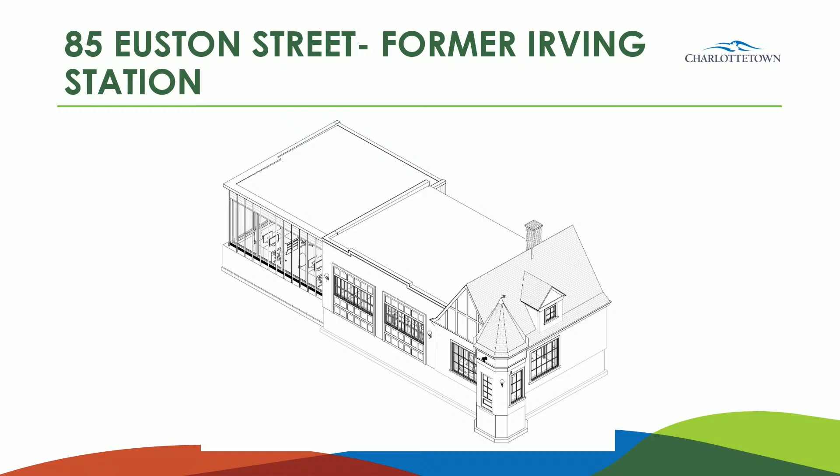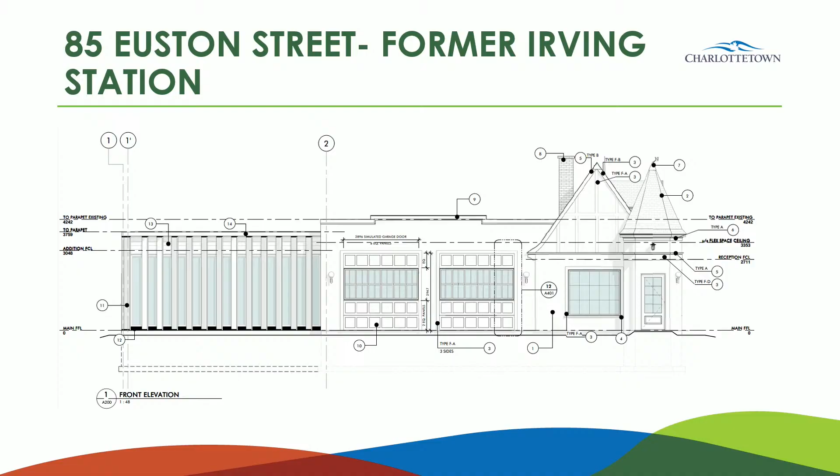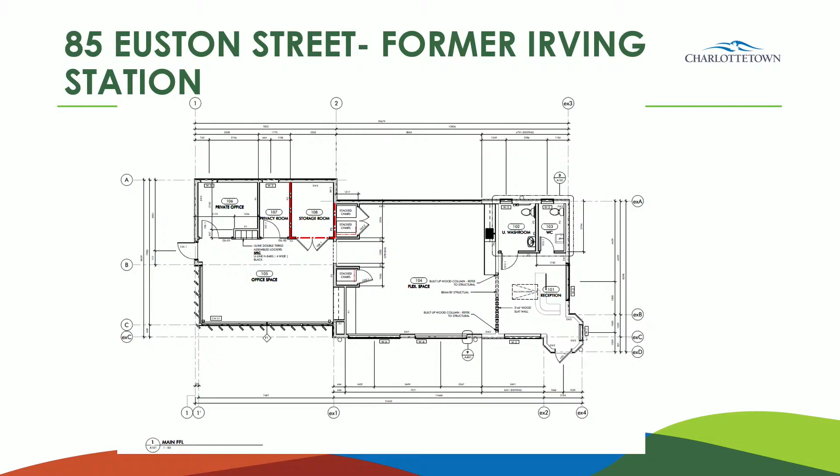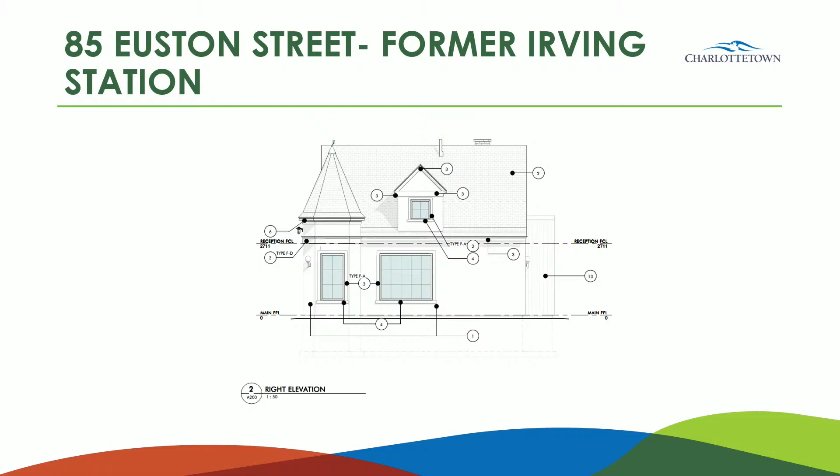The approximately 25-foot by 26-foot new addition is set back about 2 feet from the front facade of the main building, and the addition is to be clad in a combination of black vertical metal cladding and a Nordic oak batten system. The new addition will accommodate office and storage space, while the original structure will accommodate a flex space to host groups and/or events. Historic details such as molding profiles, the weather vane, and appropriate lighting fixtures are to be reinstalled in original locations.

So it's recommended that Heritage Board recommend to council to approve the application for the rehabilitation of and a new addition to 85 Euston Street. And I'll just have Faye explain further a little bit. Thank you. Faye, welcome.

She'll switch it over. Okay. Good evening. My name is Faye El Haj, architect with Archwork Studio. It's my privilege to be here today to present for you our approach to preserving and revitalizing this important heritage building.

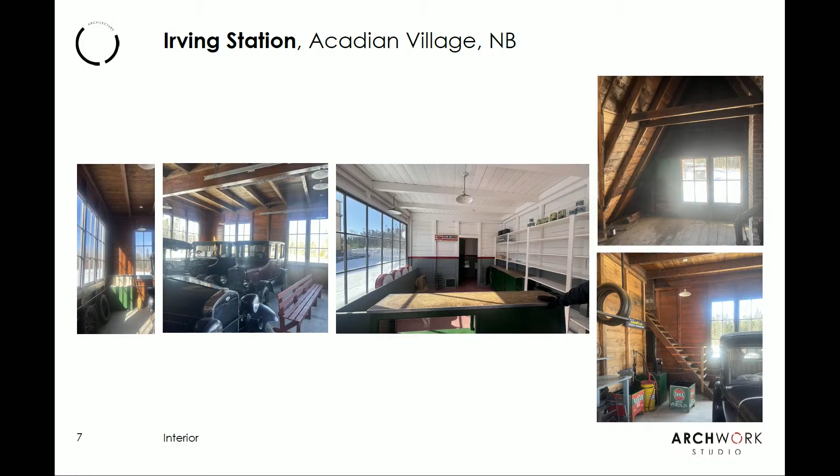We examined the details, the finishes, and the colors that they used. These are some interior pictures, some extra details with the lighting, the trim details where they kept the chimney too. We actually took some samples from there to see what they used for shingles, to match the color that it has been restored to.

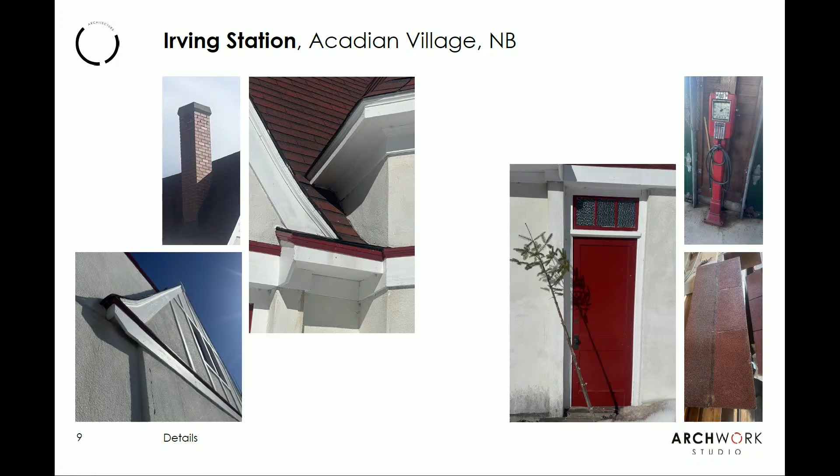For the Irving Station at 85 Euston, and for most Irving stations, they use the color palette red and white, two service bays, a gable roof, and a distinctive corner tower. The red trim was later painted green, the Irving logo was removed, and the two pumps were removed in 2008 too.

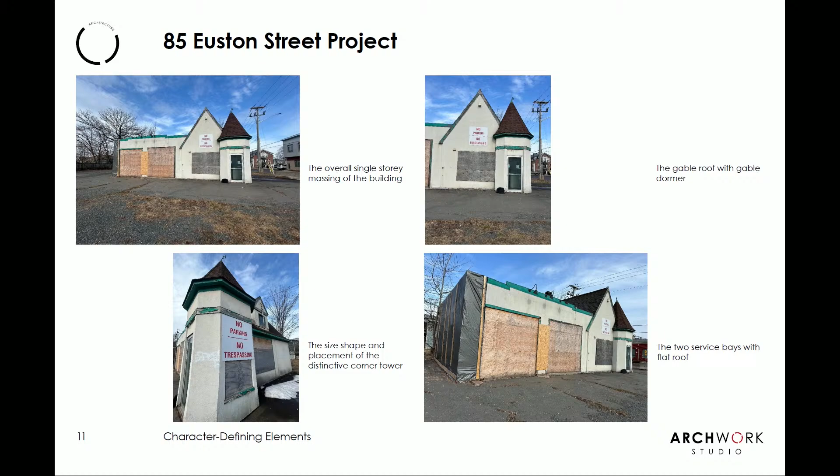These are the character-defining elements of 85 Euston. What defines the Irving Station is the overall single-story massing of the building, the gable roof with gable dormer, the size, shape, and placement of the distinctive corner tower, and the two service bays with the flat roof.

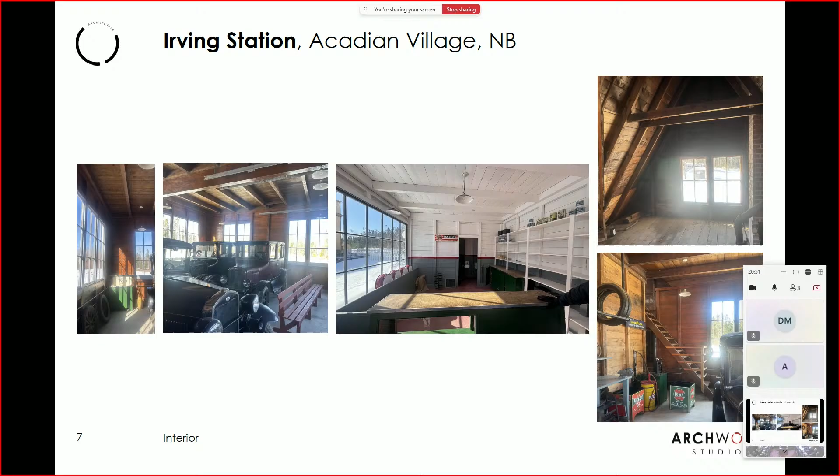These are the elevations of the Acadian village in New Brunswick for the Irving Station. It's been renovated there in 2005. Some interior pictures, exterior details with the windows, trim, doors, and asphalt shingle details. And this is the Irving Station on Euston Street.

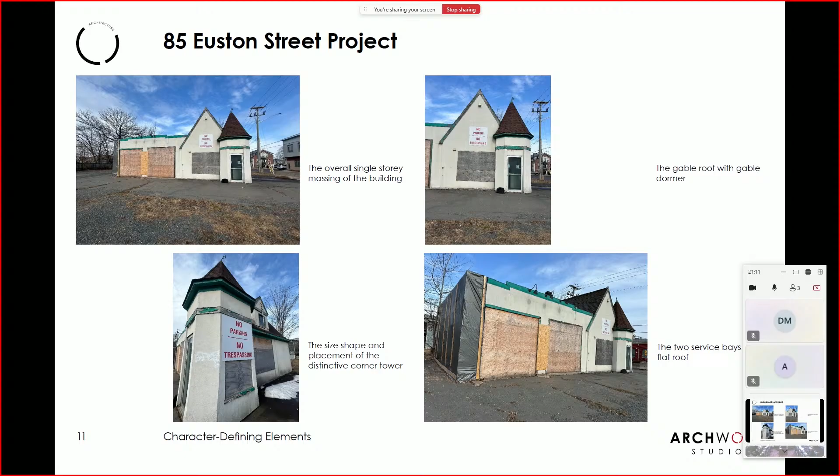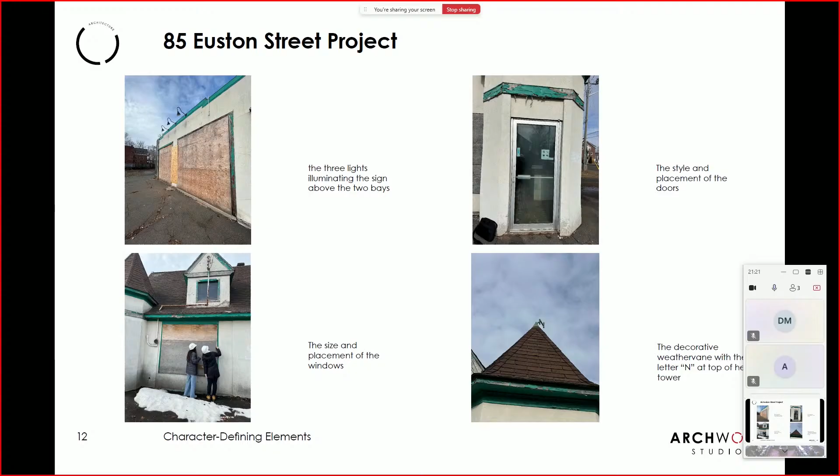We were going through the defining elements of 85 Euston. Some of these are the three lights above the bays, the size and placement of the windows and doors, the decorative weather vane with the letter N at the top of the tower, the decorative band running across the tower and dormer painted to match the trim of the gable, and the brick chimney.

This is the existing conditions. We have deteriorated trim and windows. The facade is largely intact but weathered, and some areas need to be structurally reinforced too.

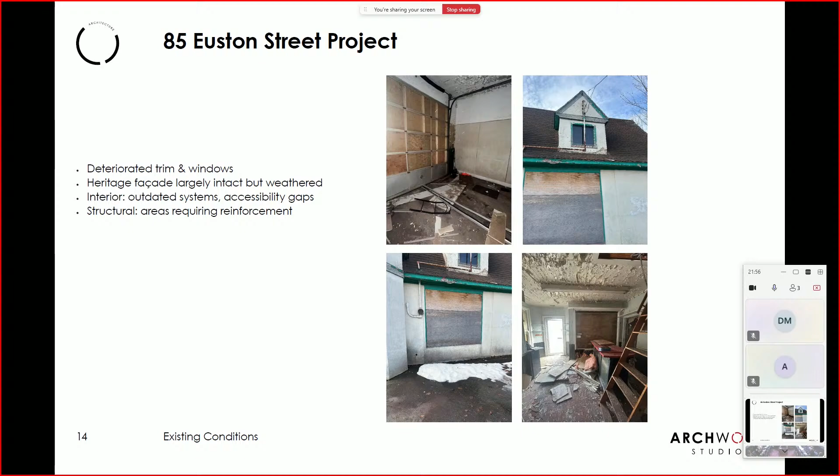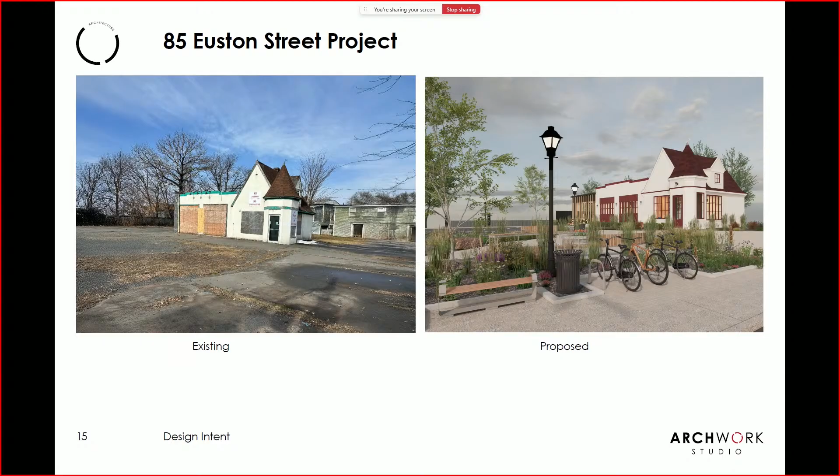This is the existing 85 Euston, and on the right is the proposed 85 renovation building. It's not sliding, not changing.

So what we did was preserve the character-defining elements that I mentioned before. We used asphalt shingle to match the original red palette. The windows are custom-clad wood windows replicating the historic profile, with divided light configuration matching original proportions, and heritage-style entry doors with transom, upgraded for accessibility and energy performance.

The color palette used is the heritage one, red and white. We used PVC trim instead of wood for durability and low maintenance, but the details imitate the original wood profile. The corner boards, window surrounds, and eave molding are restored or replicated. The existing chimney is retained and rebuilt using veneer.

There was an accessibility upgrade to have a barrier-free washroom, tactile wayfinding, and barrier-free entrances. The building is energy efficient. We used insulated wall and roof assembly and energy-efficient glazing to meet the net zero ready goals for the project.

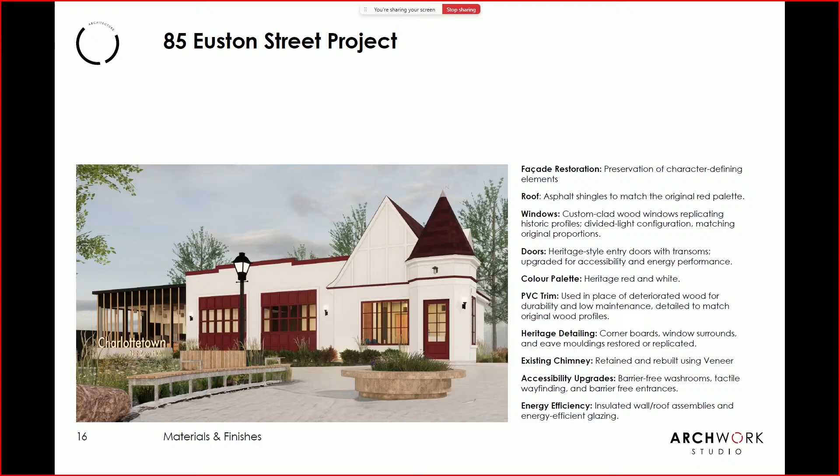This project does not consist of existing building alone, and in addition to the building, we also worked on the site to make it welcoming for the community, to have public access to the building, and to add value to downtown Charlottetown, because we know the importance of this building for the community. We wanted to ensure continuous use of it.

As you can see, there are gardens, seating areas, and public bike shares. Also private bike shares, rain gardens, seating areas, an open lawn on the left side, and accessible parking with future EV charging.

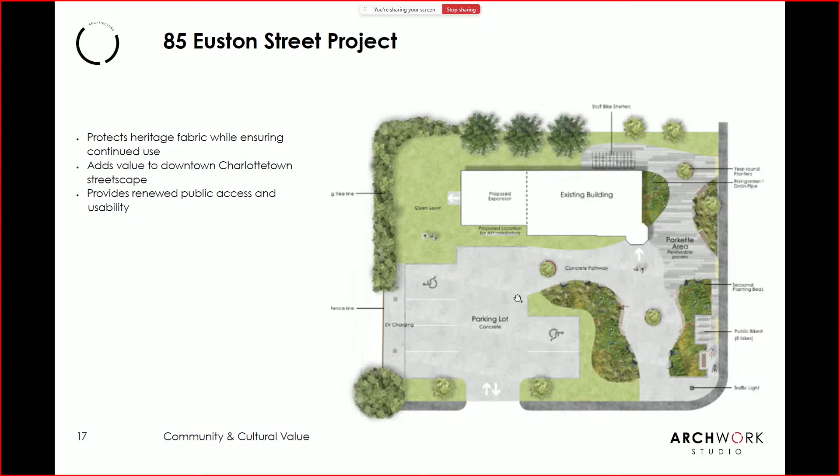We had a sensitive integration of the new addition. This new addition respects in scale and massing the existing 85 Euston Street project. It is a small addition, 59 square meters, single story, and below the original roof line, intentional to keep the heritage station remaining dominant. The cornice aligns with the existing sympathetic roof pitch continuity while distinguishing old versus new.

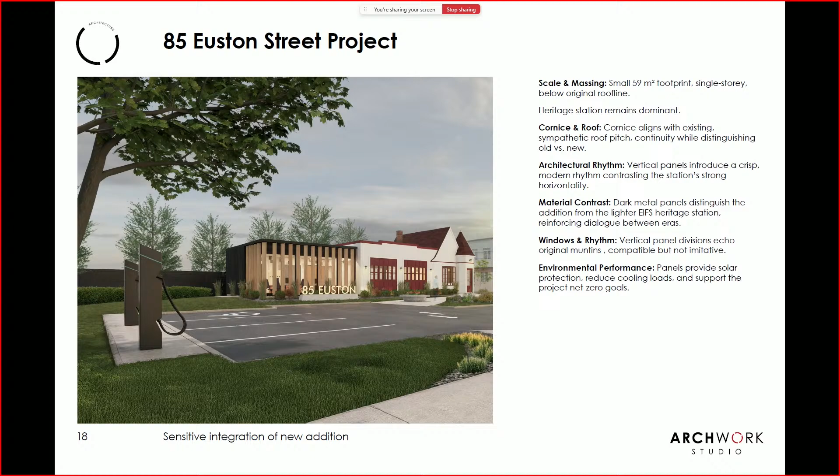The vertical panels introduce a crisp modern rhythm contrasting the station's strong horizontality. The dark metal panels distinguish the addition from the lighter heritage station, reinforcing dialogue between eras. The vertical panel divisions echo original muntins, compatible but not imitative. The panels also provide solar protection, reduce cooling loads, and support the project's net zero goals.

Finally, this project is about finding the right balance between preserving the past and building for the future. With your support, we're confident that this project will continue to serve the community, both as a heritage landmark and as a functional, revitalized building. Thank you so much, and I look forward to your feedback.

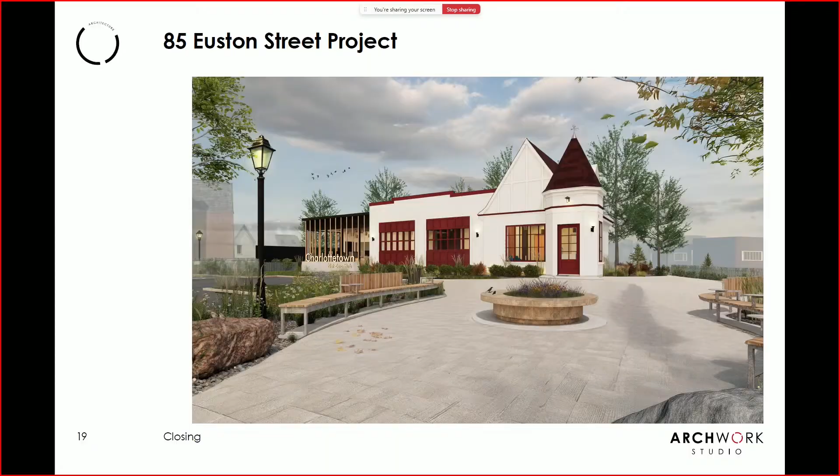Tara, go ahead. Chair, my question is, it's very contemporary, the addition that you've put on the building, and I understand the philosophy behind it, but I'm wondering if there's a way to blend it a little bit more. It's quite stark compared to the charm of the original station. I will say I'm very excited about everything else about the project, the landscaping, what you're doing with the building, and I think it's been long overdue. But that was my only question. Is there a way that the addition could blend a little more with the building? I find the contrast dramatic, and you may have been going for that, but I'm not sure it's necessary, is my question.

Whenever we did the study for the Irving Station, what characterized and unified all the Irving Stations were the two bays, the flat roof, the gable roof, and the tower station. Whenever we want to blend an addition, the Irving Station will no longer be dominant, even if we match colors. So intentionally we had it be a contrast between old versus new. This was the intention behind it.

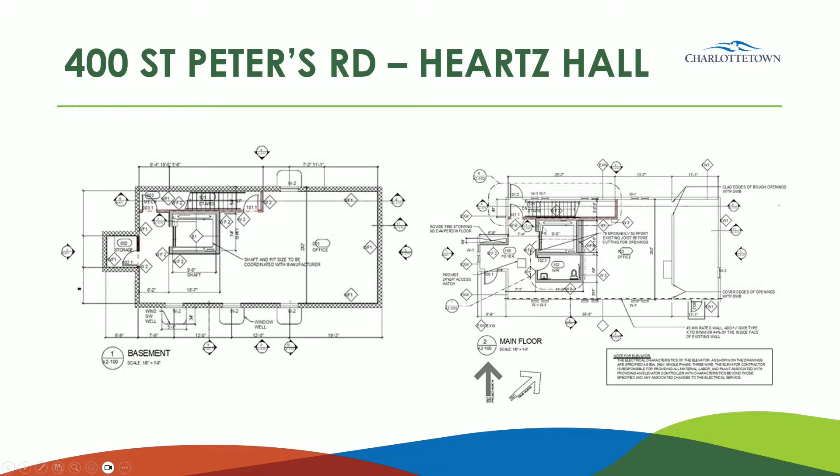With the addition of a new foundation and a usable basement level, an additional egress is required by building code from the lower level. It's proposed to add a fire door on the north side of the building, a flat panel door to minimize its appearance. In plan, it would just be right here at the top of the stairs, and right here on the end.

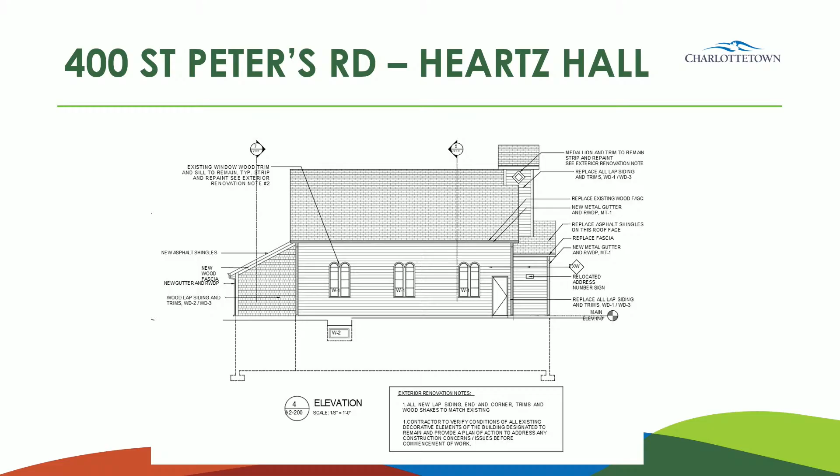The proposed exterior renovations involve recladding with new siding to match the existing, replacement of wood trims, new roof, new gutters, etc. In addition, all windows are proposed to be replaced to match the original profiles in the existing openings with fiberglass and wood windows.

It's suggested the proposed renovations do not impair the essential form or character defining elements of the property, but rather help to maintain its viability. The Planning and Heritage Department recommends Heritage Board approve the application.

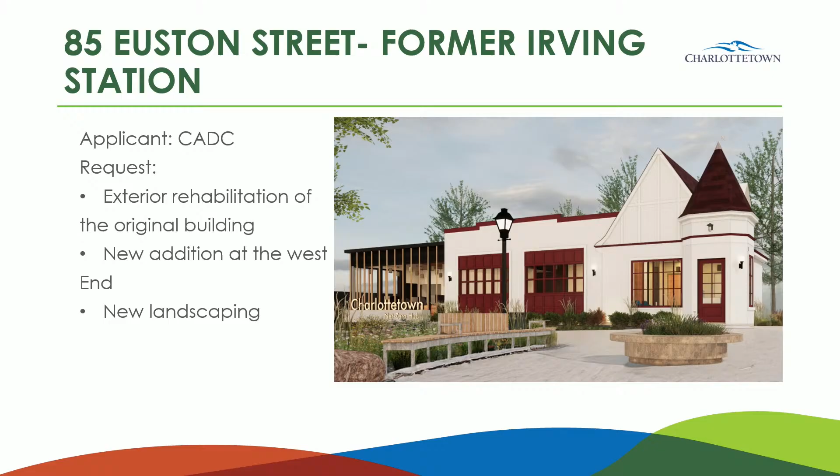Okay, and I know Deputy Mayor was hoping to get the screen back up. What I can tell you, Deputy Mayor, it's pretty much the same pictures we've seen. They're just proposing a door.

Basic. Yep, gotcha. Madam Chair. I don't know where I can ask a question, but whoever's first in the queue, I'll ask my question whenever it's my turn. I'll get right to you in a moment. Tara, you're up first. Sorry.

Madam Chair, I'm delighted to see the progress on this building. I understand the requirement for the door, and I have no difficulty with it. It's going to be blended to disappear as much as possible, and I would so move that the application be accepted.

Okay, I'm going to switch to the Deputy Mayor for a moment for your question. Thank you. Just wondering, I've no issue with supporting the heritage recommendation, recognizing that the heritage renovations outlined meet and adhere to the existing heritage bylaw. I'm just wondering, are we approving the RFP that we deferred, or is this just covering off the heritage component, and then we still need to go back to the deferral at our next monthly meeting of council to discuss the cost? I'm just looking for clarification.